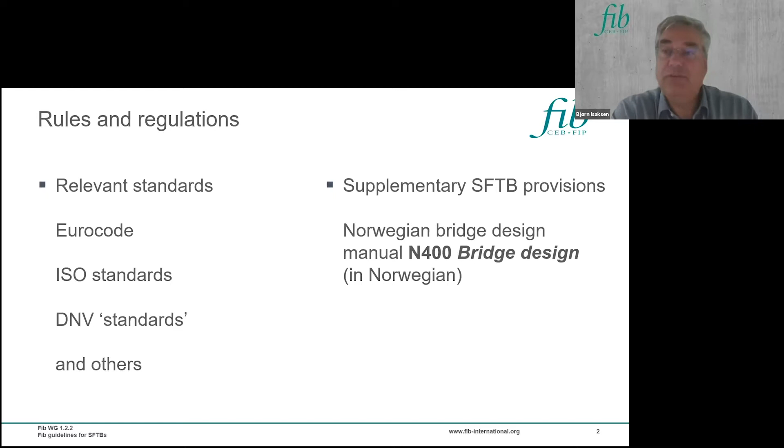As a supplement, SFTB provisions may be found in a publication called the Norwegian Bridge Design Manual, N400 Bridge Design. It's unfortunately in Norwegian, but you will find it on the web free of cost. I will talk in more detail about Eurocode than other standards, and the simple reason for that is that this is the structural standard I am most familiar with. Nevertheless, some of my comments will also be relevant for other standard regimes.

Eurocode, and this is the first generation, which was published in 2010. You have EN 1990, basis for design, which is the framework for all the Eurocodes. And you have this important one, EN 1991, which gives you loads, or actions, which is the term used in Eurocode. You also have the important 1992, concrete structures, and 1993, steel structures, as well. And in EN 1994 you have the possibility for using composite steel and concrete structures. You also have some other parts related to seismic design and geotechnical aspects and so on.

Some comments in the beginning. The framework, and this is actually the basis for all of it, is given in 1990. But important environmental loads or actions are not given in 1991, for example, surface wave loads and current and tides. And the Eurocode has a great ambition. These structural design codes are intended to be harmonized with the execution, material and test standards, as well as technical specifications for construction and products.

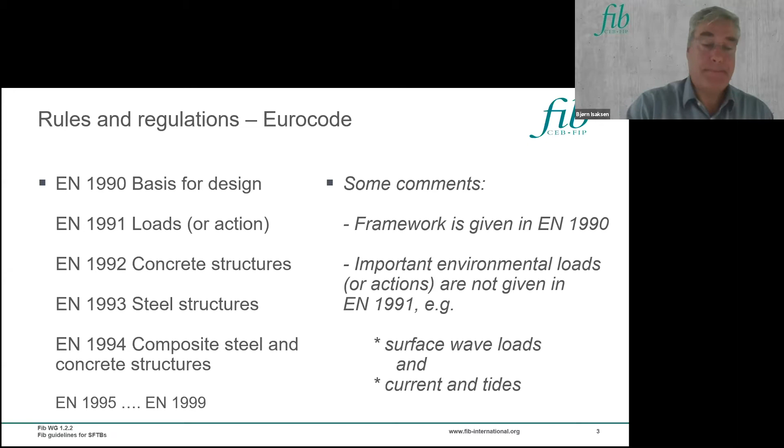And then it comes to the ISO standards. The ISO 19900 series is relevant for design, construction, transportation and installation of offshore structures. And we are here talking about both gravity-based and floating structures, which is, of course, very relevant for the submerged floating tube bridge. And it is applicable to the design of complete structures, including substructures, foundations, and mooring systems.

Then you have ISO 19900, which provides general and specific principles for the design of offshore structures. You have 19901-1, which gives you metocean criteria, geotechnical and foundation design considerations, weight control, and marine operations. And it's also worth mentioning 19903, the second edition, covering fixed and floating concrete offshore structures.

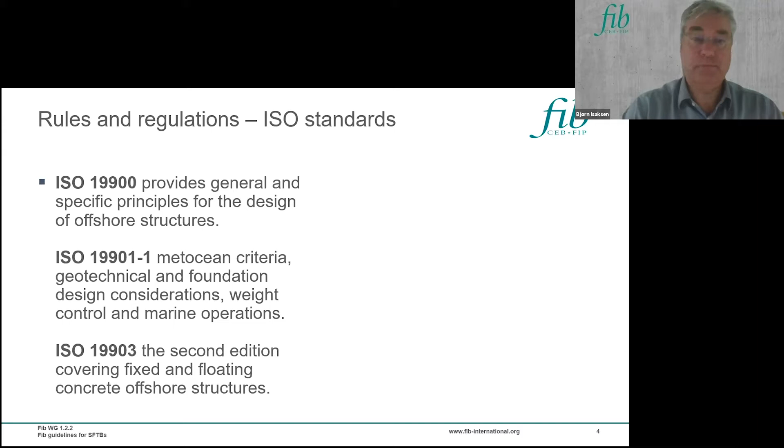Then to the DNV standards, and I will also comment on the phrase standards. We are now talking about DNV documents. DNV, due to a reorganization process, is now called DNV. It was earlier called DNV GL, Germanischer Lloyd, and this is a ship classification company. Nevertheless, they have some very relevant documents, what we can call offshore standards for structures, reflecting more than 40 years of experience with marine structures, especially in the North Sea, but also elsewhere.

I will mention specifically these two documents, offshore standards OS-C101 and OS-C502, which provide the general part of the offshore standards for structures. And these documents give specification of wind, wave, VIV, and current actions, as well as their correlation, that's load correlation, the design format, analysis approaches, and foundation design premises. VIV, that's vortex induced vibrations, is very important in fluid dynamics and may cause severe design issues. So that's of special interest.

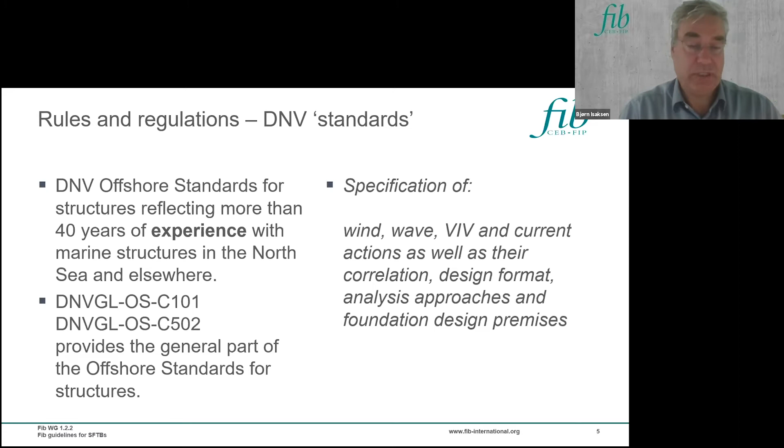Then what else have we? The other standards. Of course, it's worth mentioning the AASHTO standards, the American. British standards are often very useful, and of course they have to be mentioned here. And the American Petroleum Institute has published offshore structural standards, which are relevant.

And in this context, the FIB model code for concrete structures is especially interesting and should be mentioned, due to verification of limit states associated with durability, robustness, and sustainability. Please remember this comment regarding verification for my next presentation in the afternoon. I will also mention something which is not written in the text: the NORSOK standards developed by the Norwegian petroleum industry.

We also have a very interesting document, the DNV recommended practice C205, which gives you information about environmental conditions and environmental loads. This document is due for a major update now in 2021-2022. It's also worth mentioning that reference may be made to immersed tunnel design and construction.

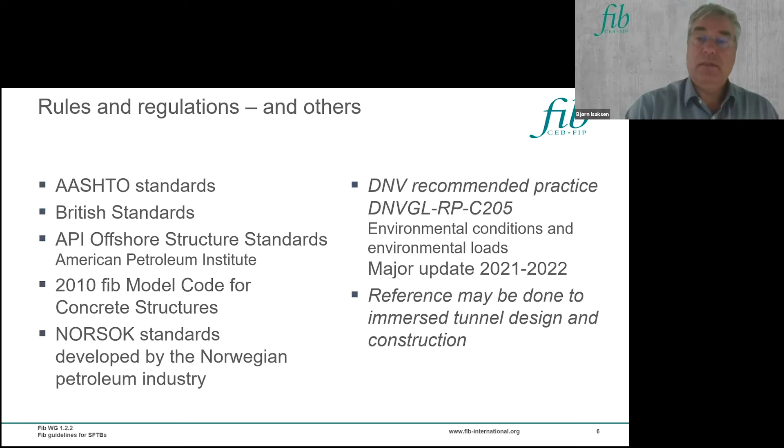Sometimes what's not written in the text is of special interest, and here are some comments. A general principle in standardization, and Eurocode is a good example, is that no mixing of standards is allowed. So Eurocode should not be used in combination with other national or international standards. This will, of course, be a big challenge in case of lack of information, as mentioned earlier today, especially in the load chapters in Eurocode.

Also, it's worth remembering that the first generation Eurocode, the code which is relevant today, was intended for structures such as buildings and bridges, not including offshore structures. So something will be missing when you try to use the code today for offshore structures.

A second important comment is that structures where structural dynamic response is relevant are in general not covered. The basis of design, EN 1990, of course takes these dynamic effects into account, but when it comes to the load chapters, it's not so simple. So structural dynamic response is often taken into account by simplified methods. All these limitations for use, as I will call them, may be a challenge regarding the submerged floating tube bridge.

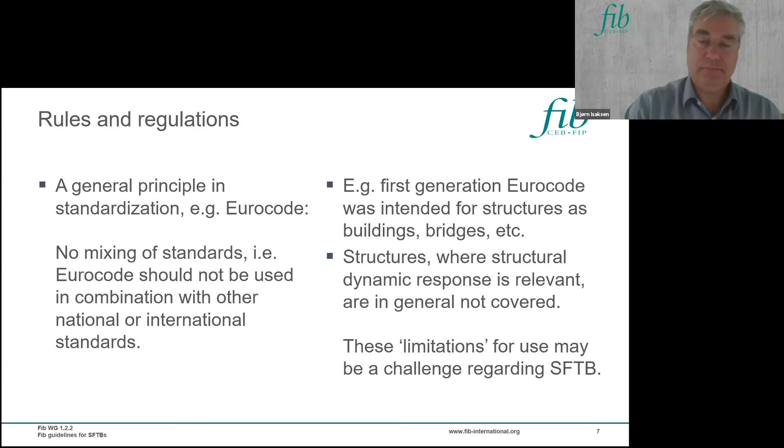It's also worth mentioning an important EU directive regarding tunnels. The submerged floating bridge will be recognized as a tunnel. Nevertheless, for a structural engineer, the SFTB is a bridge, of course. The directive, which came in 2004, is named 2004/54/EC on minimum safety requirements for tunnels in the trans-European road network.

This directive ensures a minimum level of safety for road users in tunnels in the trans-European road network. A directive in this context is a legislative act that sets out a goal that all EU countries must achieve. So implementation in national legislation is mandatory, and that also includes the EFTA countries, that is Norway, Iceland, and another country I don't remember.